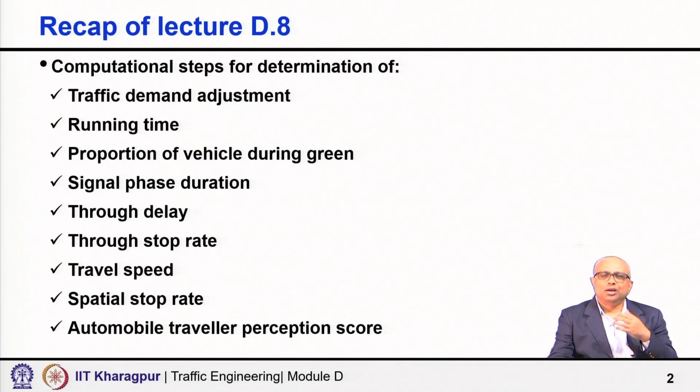With this background, today our focus is on planning level analysis of LOS. The previous lecture and even the last two lectures were more on the operational framework. The flow chart we discussed in detail in the last lecture was the operational framework, and in lecture 7 also, towards the end, what we presented to you is the operational level analysis framework.

Now, the operational analysis is exhaustive, but computationally intense and also requires software to implement. Why is it computationally intense? The intensity stems from the need to model traffic movements in terms of their interaction with each other and with the traffic control elements. When we discussed all the steps, I did not discuss everything in detail, because it was simply not possible within just one lecture. In many cases I just mentioned the concepts, the ideas, what we are doing, why we are doing, and how we are doing. Many cases I omitted because of the complexity.

Now, planning level analysis, what we are going to discuss today, is not computationally intense. That is one advantage, and this can be applied easily with minimal data and is particularly suitable when approximate results are desired. That is the planning level application, because in planning level we really do not have all the data, and also it is not necessary to have very accurate results, because the purpose is planning, alternative evaluation.

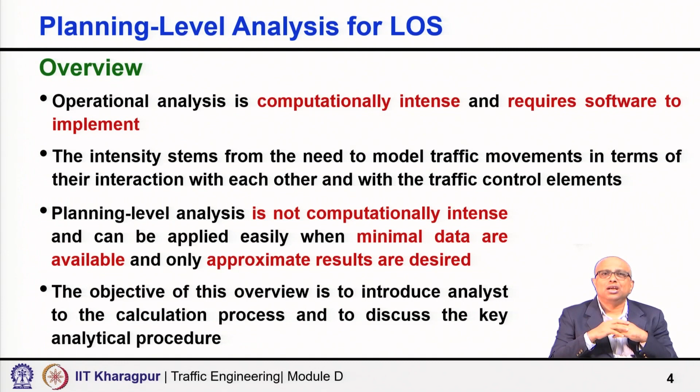The objective of this overview in today's lecture is to introduce analysts to the calculation process, how we go ahead with the planning level analysis of level of service, and to discuss the key analytical procedure.

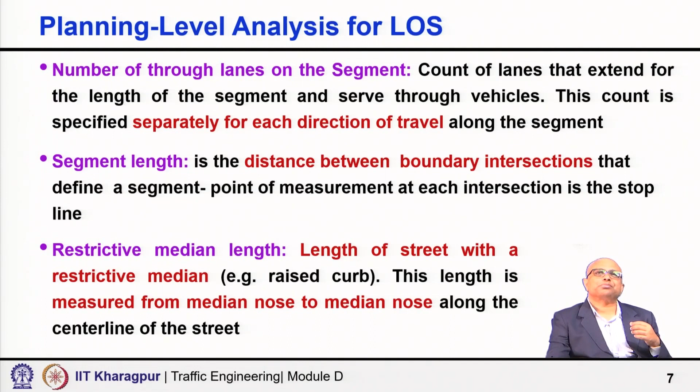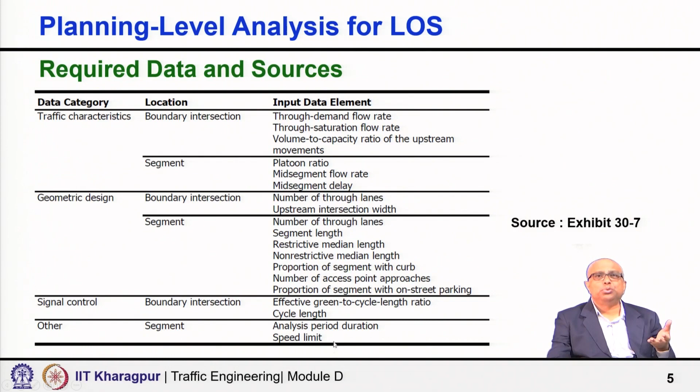Then next, proportion of segment with on-street parking. Here it is the proportion of link length with parking stalls, marked or unmarked, which are available along the right side of the segment. In Indian conditions, it will be the left side of the segment, because in Indian conditions on-street parking always happens on the left side. So, that is how the proportion of segment with on-street parking may be calculated. Now, as I said, I have listed all the inputs here. I have not discussed all of them, but some of the inputs I tried to describe.

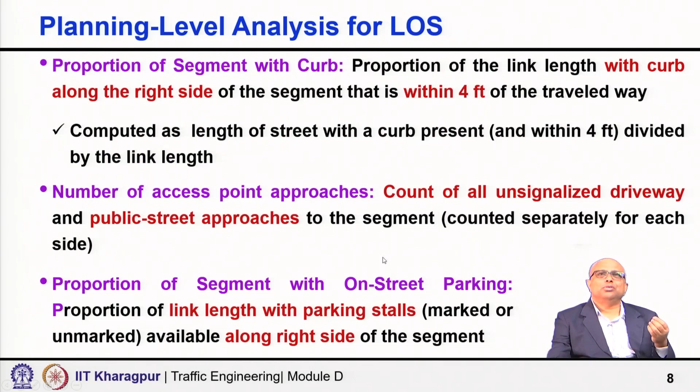Now, with this background, let us go to the methodology part. In the Highway Capacity Manual, the planning level methodology consists of 5 computational steps. Namely, first determine the running time, then determine proportion of vehicles arriving during green, then determine through control delay for through movement, determine through stop rate, then with all this input determine travel speed, spatial stop rate and level of service. So, these are the 5 computational steps.

For each step they suggest a worksheet which is very useful. You can actually link those worksheets and create a very useful Excel spreadsheet to do the calculation in a systematic manner, and they are really very helpful. So, I have indicated here what exhibits you may refer to if you are interested to know each and every step in detail. For the class purpose, I need not describe each of these exhibits; rather I am just indicating what exhibit you can refer to for which computational step.

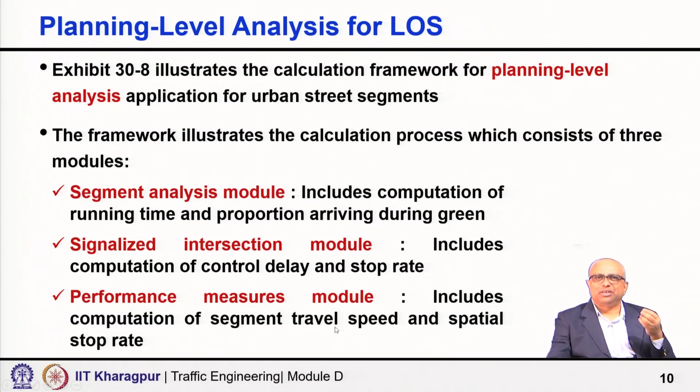Then the third module includes performance measure, basically computation of segment travel speed and spatial stop rate. Okay. So, similarly, you can see this exhibit which determines travel time, spatial stop rate and finally, the level of service.

We have not yet discussed what is platoon ratio. Again, as I said, the next module deals with intersection and intersection control, especially signalized intersection in detail. So, many of the terminologies are actually discussed there. Again, the signalized intersection module computes control delay, stop rate, and for that we are giving inputs such as intersection effective green time to cycle ratio, G/C ratio.

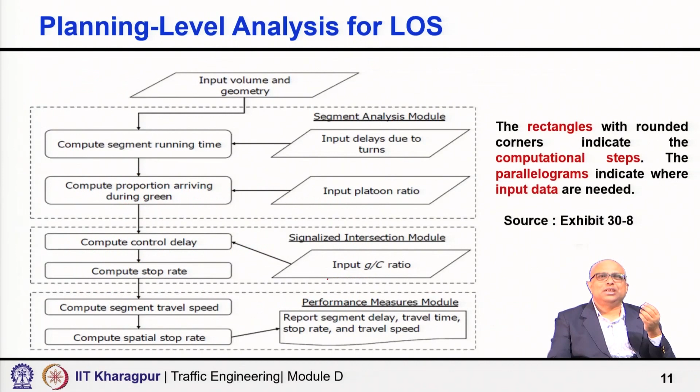So, I will only show the calculation of those components which are required to finally conclude what is the LOS. To calculate the traveler perception score, additional data will be required, and some of those calculations I am going to omit. So, I have actually taken an example which is a simplified example with this background.

The total length of an undivided urban segment is 1800 feet. Both boundary intersections are signalized. There is a 4-lane cross section with 2 lanes in each direction. Left-turn bays on the subject segment at each intersection are present. 2 access point intersections are there, and each intersection has 2 stop-controlled side street approaches.

So, as shown here, the through volume is 950 and 968, and the distance is 1800 feet of the segment. So, determine travel speed and LOS for the following input data. As I have said, whatever inputs are required for the calculation of LOS with the simplified framework that I have used.

So, the segment through saturation flow rate is given, mid segment volume is given, g/C ratio, effective green time to cycle time, that ratio is given, number of through lanes at boundary intersection is given, through lane group volume is given, eastbound and westbound, startup lost times are given, base free flow speed we could estimate, whatever you know how the base free flow speed and the free flow speed can be estimated, right.

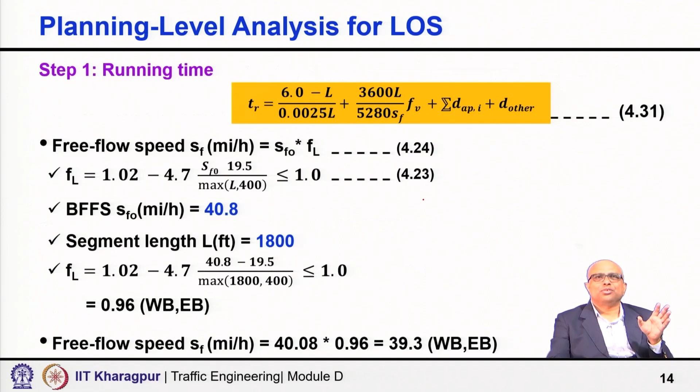To calculate the running time, we need total delay due to turns into the access point. That is given, 0.52 seconds per vehicle, and delay due to other mid segment sources is assumed as 0 here. With this we calculate TR, the running time. This is the equation used, and you get 33.7 seconds for both westbound and eastbound. So, that is our step 1, where we have calculated the running time.

So, once we know the running time, then we go to step 2, that is travel speed. How do you do it? With this equation, 3600 into length divided by 5280 into TT. It is not written correctly here, it is a typographical error. So, travel time should be TT. Now, what is TT? It is the running time plus the control delay.

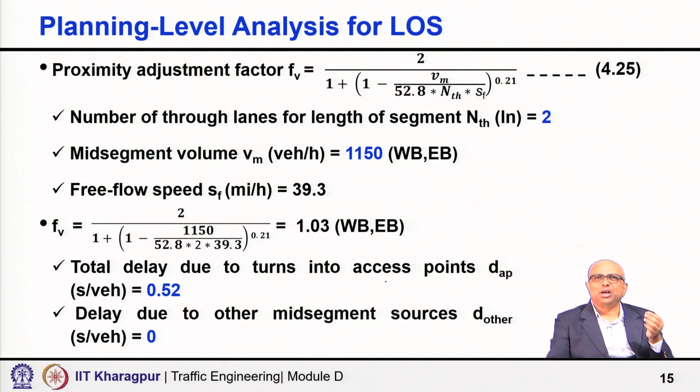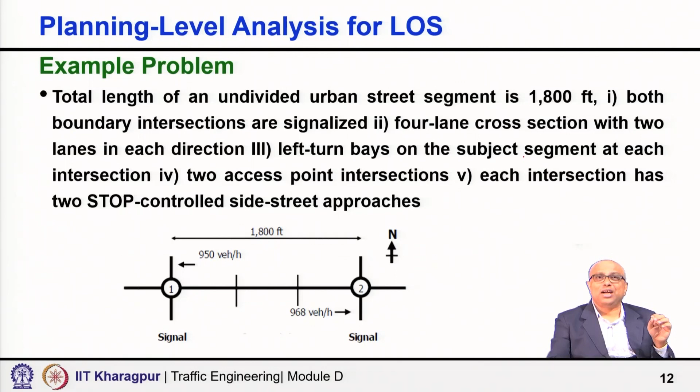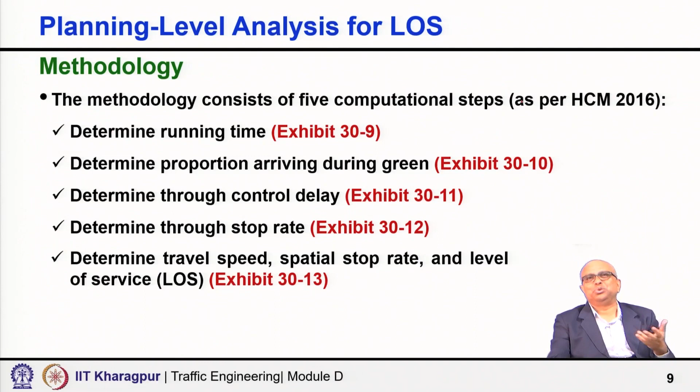Now, the control delay is again an input for us, 14.7 and 24.1. I have said that we could calculate it, but several inputs and several steps will be required. There is also exhibit 30-11 for determining through control delay. I have completely omitted that, I have just assumed that you know it. You will learn in module E how to calculate control delay. So, the control delay is known in this case.

So, with that we know the running time as calculated, 33.7, and the control delay is known. Control delay is different for eastbound and westbound, so the TT value also has to be calculated separately because TT is TR plus D. In one case I have shown the calculation for the eastbound, 33.7 plus 14.7, so 48.4, and then you can calculate ST, travel speed, using this formula.

So, you get it for the eastbound as 25.4 miles per hour and for westbound, using the different control delay value, 21.3 miles per hour. Once this is done, we go to the level of service calculation. For level of service calculation, first we need to calculate the volume to capacity ratio. So, what is the through volume and what is the capacity?

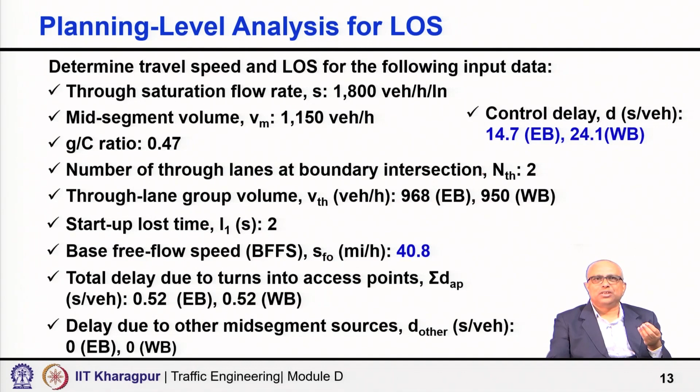Through lane group volume we know is 968 and 950 for eastbound and westbound respectively. These are given, so we are directly taking those values. Then the capacity, how can we calculate it? This is again known to you: saturation flow rate into g by C multiplied by number of lanes. g is the effective green time, so effective green time to cycle time ratio, g by C into s, because that is the fraction where you actually get discharge at saturation flow rate. So, the capacity can be calculated.

In this case, the number of lanes is 2 and lane group saturation flow rate is 1800 vehicles per hour per lane, again given, and the effective green ratio, g i by C, is 0.47. So, you can calculate the capacity using equation 4.32, and using all these inputs you get 1692 vehicles per hour.

So, what is the volume to capacity ratio? For eastbound, the through lane group volume 968 divided by 1692, and in a similar way for the westbound, 950 divided by 1692. So, the values are 0.57 and 0.56 respectively.

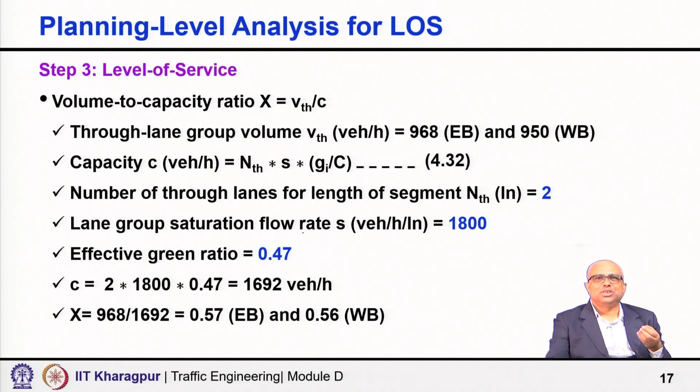Now, the travel speed we have calculated in the previous step is 25.4 and 21.3, so we put 25.4 for eastbound and 21.3 for westbound. Our volume to capacity ratio is less than 1, so it does not go to LOS F. Then according to this travel speed, in both directions the level of service is C. So, this way you can calculate it.

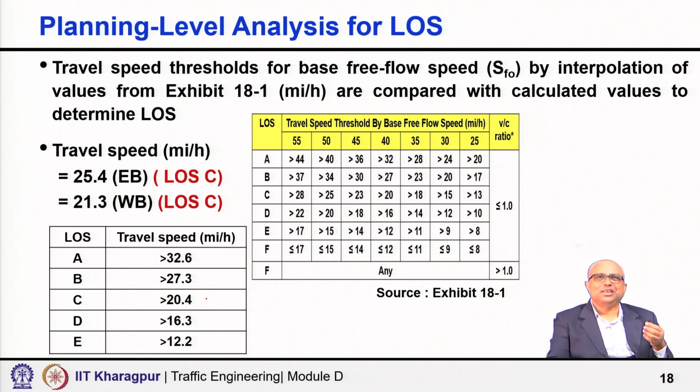Obviously, the additional inputs I have assumed for this example can also be calculated. You only need to do additional calculation, and once you know some of the terminologies when we discuss module E, you can make those calculations very easily. So, what we discussed is planning level analysis, with the aim of calculating the level of service. We discussed the overall framework, calculation of running time, proportion arriving during green, control delay, stop delay. These are the 5 worksheets which you can use effectively. Then we took a simplified example and showed how you can calculate the level of service.